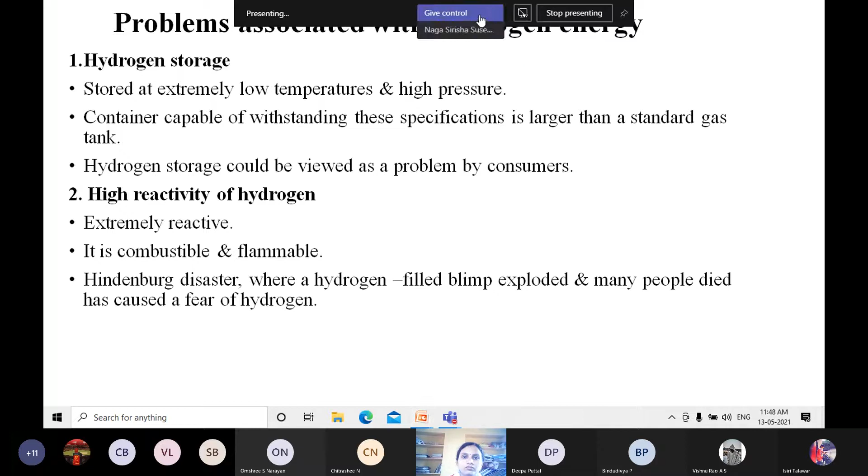Okay, in last class we have discussed about the benefits, applications, advantages and disadvantages. Today we shall discuss about the problems associated with hydrogen energy.

First, hydrogen storage. The main problem is hydrogen storage. It is stored at extremely low temperature and high pressure, and the container capable of withstanding these specifications is larger when you compare with the standard gas tank. Hydrogen storage could be viewed as a major problem by consumers.

First problem is hydrogen storage, and the second is high reactivity of hydrogen. It is extremely reactive, and it is combustible and flammable. In one incident, the Hindenburg disaster, a hydrogen filled blimp exploded and many people died, which caused fear of hydrogen.

In the Hindenburg disaster, the hydrogen tank or filled blimp exploded. Many people died due to that. So it has caused a fear of hydrogen. People are fearing about that.

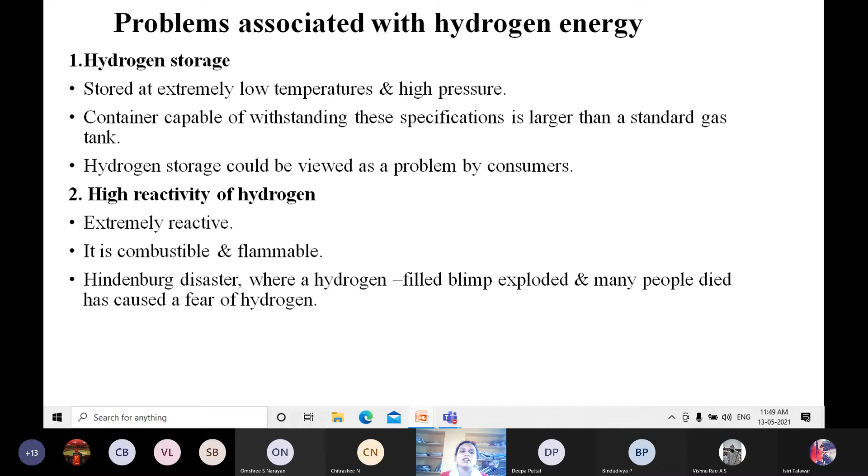Next is the cost and methods of hydrogen fuel production. The current production of hydrogen takes a lot of energy. New clean energy technology or hydrogen production methods will need to be developed for hydrogen vehicles to make sense. If we want to use hydrogen vehicles, it should be cost effective and economical, and it should be clean, new energy technology. Then only, if it costs less, will consumers take and use it.

Next is the fourth problem, consumer demand. The less consumer demand there is, the less hydrogen can be produced, because if consumer demand increases, they can produce more hydrogen. The problem for hydrogen fuel is consumer demand and the cost to change all gasoline filling stations and vehicle production lines to hydrogen, since nowadays we are not using hydrogen as a fuel for vehicles. Major transport companies will not start producing hydrogen vehicles until there is consumer demand. If the consumer demands hydrogen fuel vehicles, then only will transport companies start producing them.

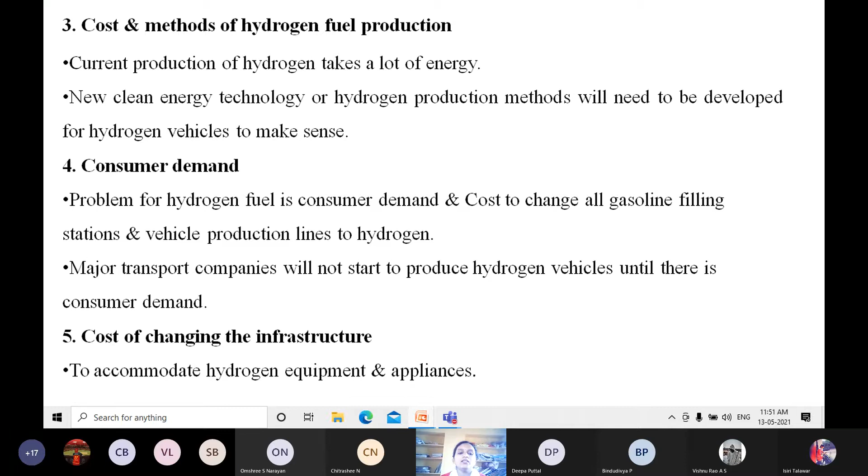Before going to the windmill, what are the problems associated with hydrogen that I have discussed? Can anyone answer? ICV, Bindu, Divya? Still, anyone can answer? What are the problems we are facing with hydrogen? What are the points I have said now?

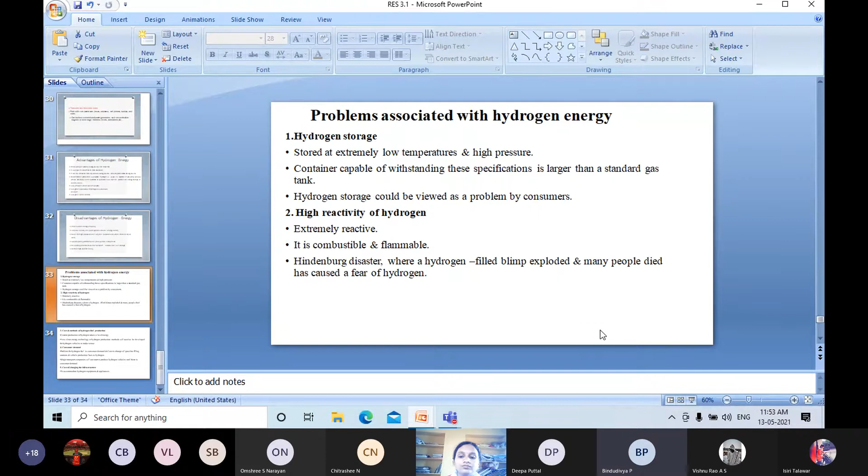Hydrogen storage, and it is highly reactive, the reactivity of hydrogen. Yes, answer. Ma'am, related to its storage, and it is extremely reactive. Yes. And cost and method of hydrogen fuel production. Yes, true. And cost of changing the infrastructure and consumer demand. Next, can anyone answer?

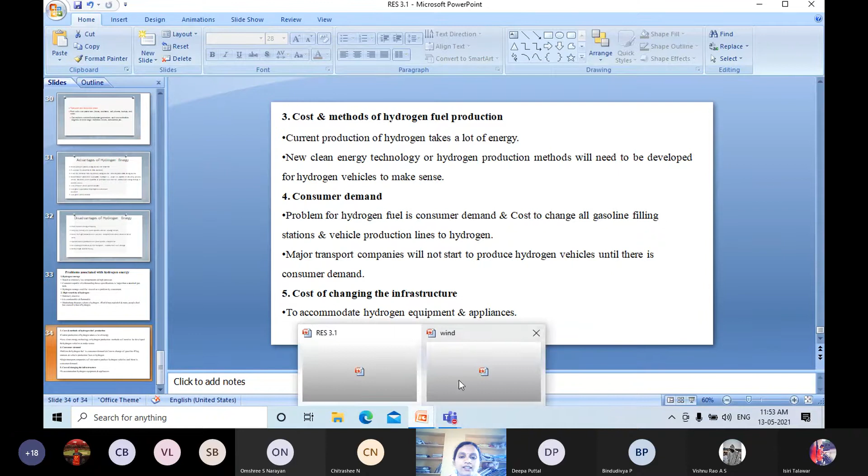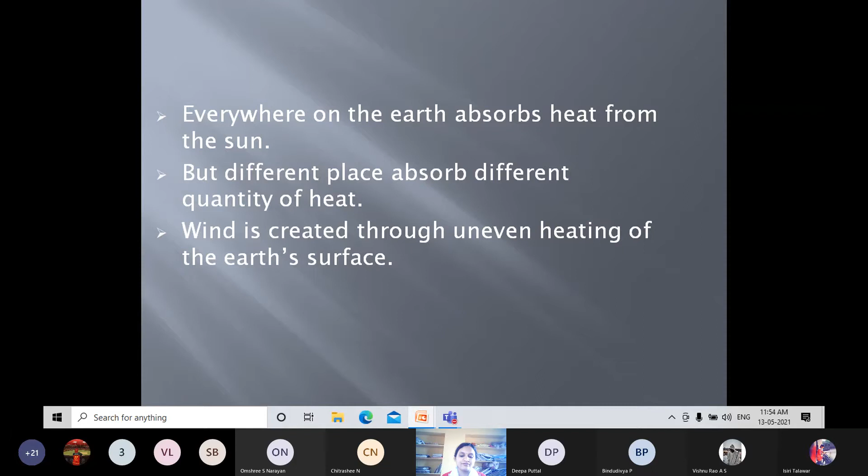What is wind? Everywhere on the earth it absorbs heat from the sun, but different places absorb different quantities of heat. Wind is created through the uneven heating of the earth's surface. We say that the sun is the main source of wind, because wind is considered a form of solar energy. Wind is due to the uneven heating of the earth's surface by the atmosphere from the sun.

Next is a windmill. It will convert the energy of the wind into rotational energy by means of blades. By using the blades, it converts the energy of the wind into rotational energy. This is used to mill grain and to pump water, etc.

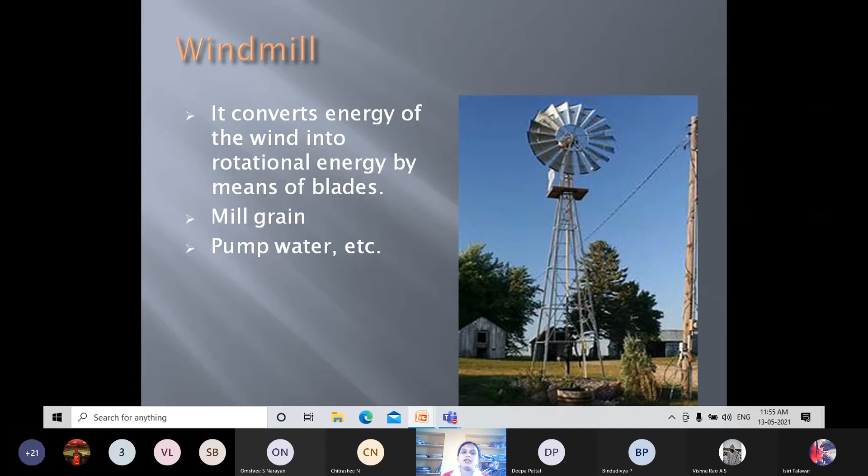Next, wind resources. In wind turbines, a generator is coupled to the shaft. Coupled with the shaft, electricity is produced and we utilize it for many purposes.

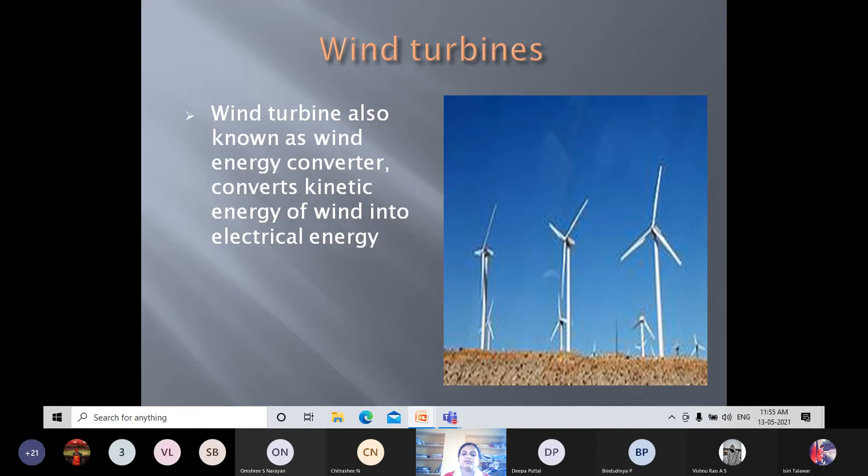Wind resources worldwide capacity reached 1,96,630 megawatt, out of which 37,642 megawatt were added in 2010, slightly less than the capacity added in 2009. Wind power showed a growth rate of 23.6%, the lowest growth since 2004, and the second lowest growth of the past decade.

And all wind turbines installed by the end of 2010 worldwide can generate 430 terawatt hour per annum, that is, per year.

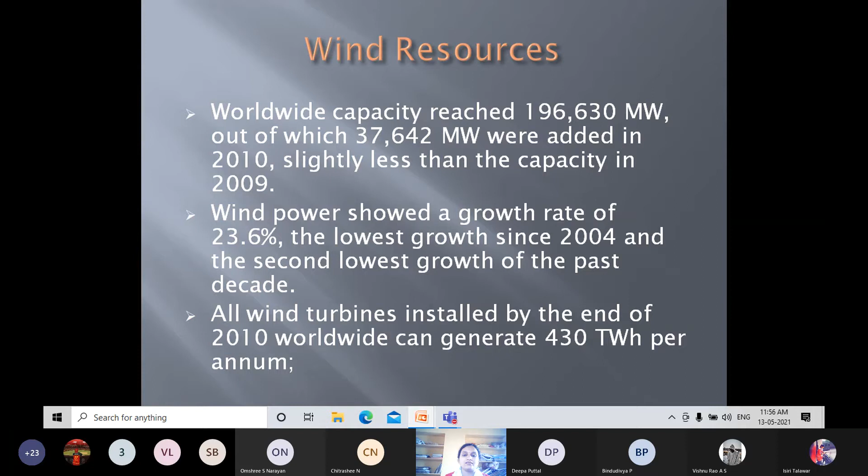China became #1 in total installed capacity and the center of the international wind industry, and it added 18,928 megawatt within 1 year, accounting for more than 50% of the world's market for new wind turbines. Here, China became #1 in total installed capacity when you compare with the other countries, and the center of the international wind industry also.

It added 18,928 megawatt within 1 year, and it is accounting for more than 50% of the world's market for new wind turbines. Many Western European countries are showing a stagnation, whereas there is strong growth in a number of Eastern European countries.

Germany keeps its #1 position in Europe with 27,215 megawatt, followed by Spain with 20,676 megawatt. Here, the highest share of wind power can be found in 3 European countries, that is Denmark 21%, Portugal 18%, and Spain 16%.

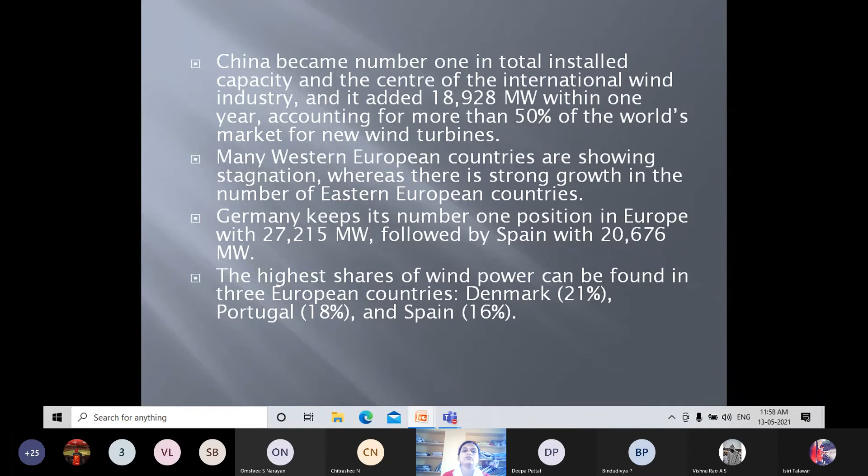In Africa, North Africa still represents the lion's share of installed capacity, while wind energy hardly plays a role yet in sub-Saharan Africa. The nuclear disaster in Japan and the oil spill in the Gulf of Mexico will have a long-term impact on the prospects of wind energy. Governments need to urgently reinforce their wind energy policies. For every construction and maintenance, they have some policies that need to be maintained.

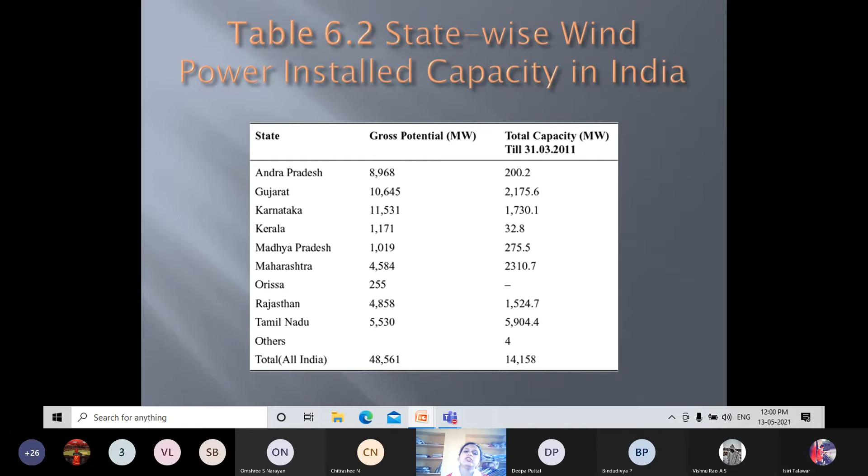The state-wise wind power installed capacity in India: first is Andhra Pradesh, second is Gujarat, third is Karnataka, fourth is Kerala, fifth is Madhya Pradesh, and sixth is Maharashtra. You can observe here the total capacity of each state, and the total capacity is 14,158 megawatt. This is till 2011.

Wind turbine site selection: how we select the site for wind installation. The selection of a wind farm site is complex and time consuming, because we should see everything, how the land is and what the wind speed is. It also involves multiple disciplines working on parallel paths, that is financing, government permits, meteorological studies, land use restrictions, and design, which have to be completed well before a site is approved and before construction can begin.

These multiple discipline factors are involved in site selection: financing, government permits we should take, meteorological studies, and land use restrictions. We should check whether it is suited for wind installation, and the design has to be completed before the site is approved. So before construction can begin, the site needs to be approved. These are the factors involved in wind turbine site selection.

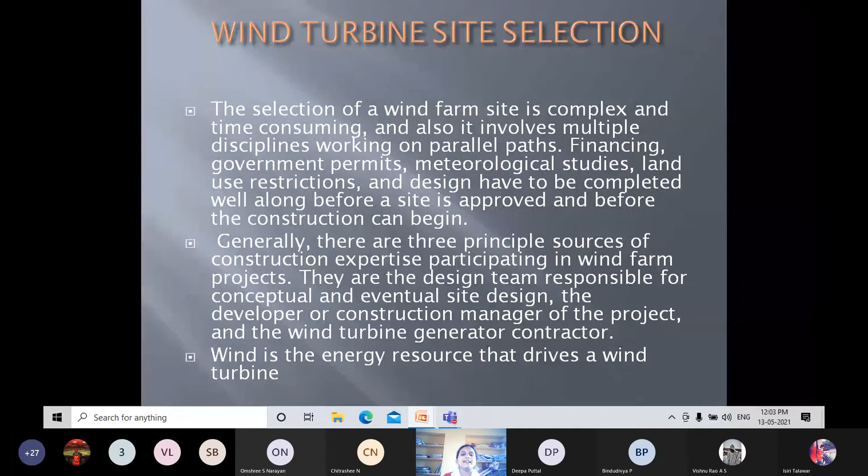There are 3 principal sources of construction expertise participating in wind farm projects. One is the design team responsible for conceptual and eventual site design, next is the developer or construction manager of the project, and next is the wind turbine generator contractor. These three are most important for site selection and construction of the wind turbine. Wind is an energy resource that drives a wind turbine.

Next, a windmill needs to be placed on a high tower located in a windy area. For example, in Chitradurga, you can observe that in hilly, mountain areas they place it on a high tower. Not just any wind will do. A wind turbine needs air that moves uniformly in the same direction. It should move continuously in the same direction.

Eddies and swirls, that is turbulence, do not make a good resource for a wind turbine. The rotor cannot extract energy from turbulent wind, and the constantly changing wind direction due to turbulence causes excessive wear and premature failure of the turbine. If the blades rotate once clockwise and then anti-clockwise, the direction changes, and the rotor cannot extract energy from the turbulent wind.

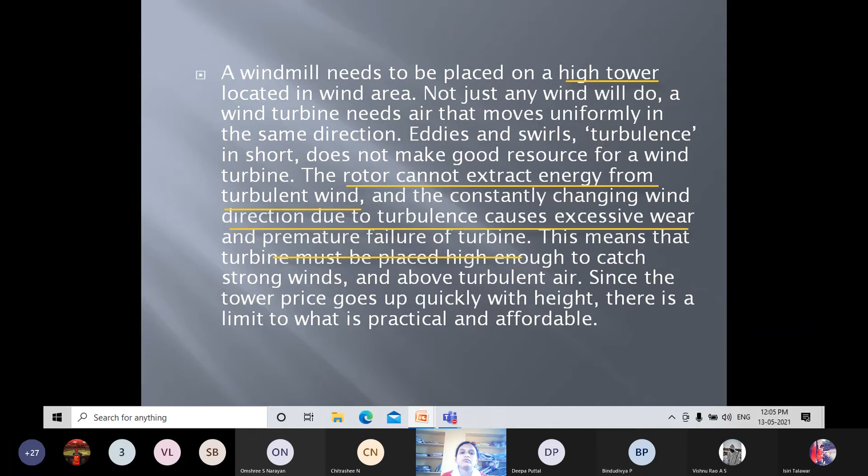Turbine height. In general, wind turbines should be sited well above trees, buildings, and other obstacles. When the wind flows over an obstacle like a building or a tree, the wind is slowed down and turbulent air is created. And if a wind turbine is located in this zone of turbulence, the result will be poor energy production and increased wear and tear of the turbine.

They are saying that wind turbines should be sited well above the trees. If the tree is this much height, then the tower, that is the wind turbine, should be placed above. Buildings and other obstacles, whatever the obstacles, the tower should be more than that. For example, if it is a building and wind is flowing like this, and the height of the tower is the same, then what about the rotation? It will not rotate; it will just go to the building. So they are saying it should be more than the height of the buildings and trees.

When the wind flows over an obstacle like a building or a tree, the wind gets slow. If wind is flowing like this, and this is a wind turbine, then what about here? Here it will only go to the building. Till here it will get slowed down; the speed of the wind will be slow. So they are saying that the wind is slowed down and turbulent air is created there.

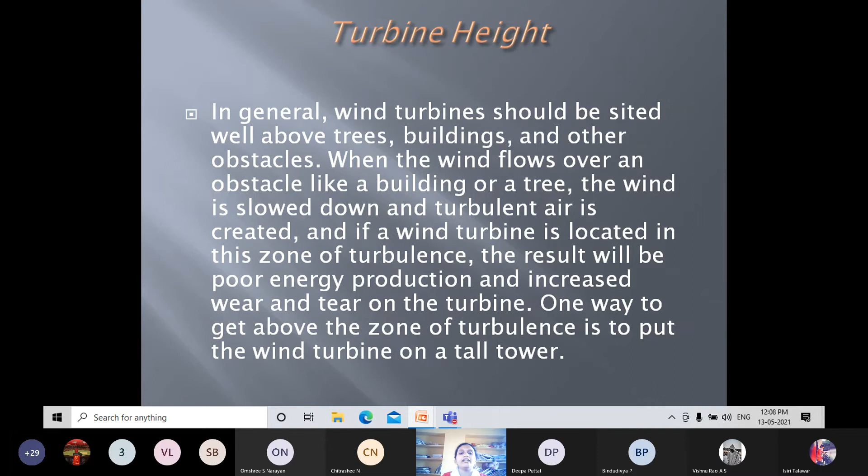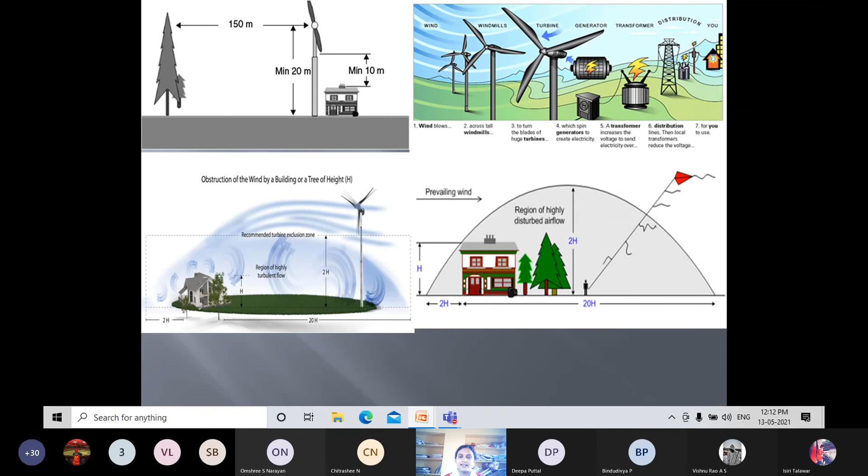Turbine height. Next we shall discuss the considerations and guidelines for site selection.